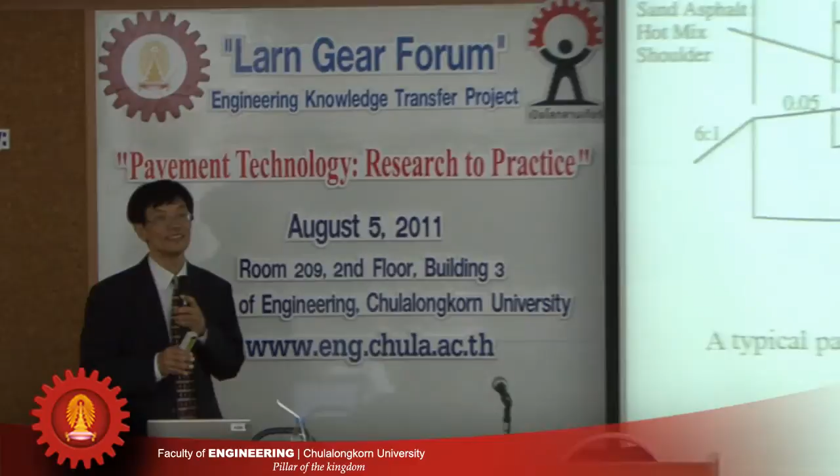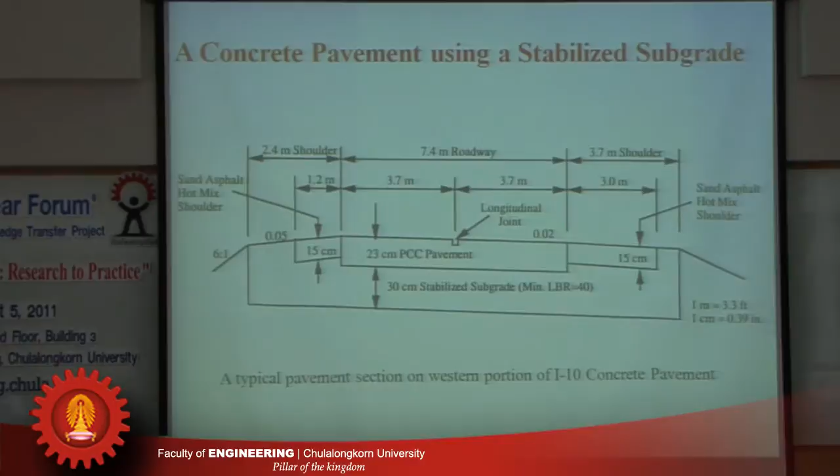When I got to the University of Florida in 1982, I noticed there were some problems with the concrete pavements on that road, and so I got a chance to investigate what the problems were.

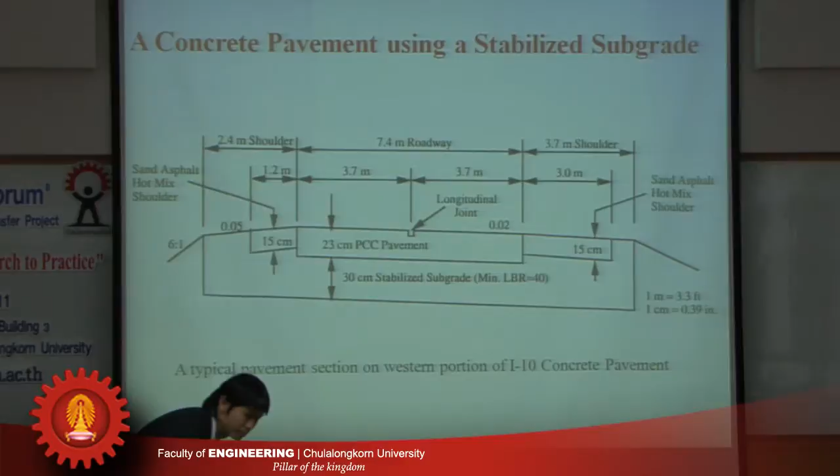At the beginning, when they constructed that concrete highway, this was the design used: 23 centimeters of PCC, meaning Portland cement concrete, and underneath a stabilized subgrade, basically a subgrade soil mixed with some asphalt emulsion to make the stabilized subgrade. This was designed according to the AASHTO Pavement Design Guide.

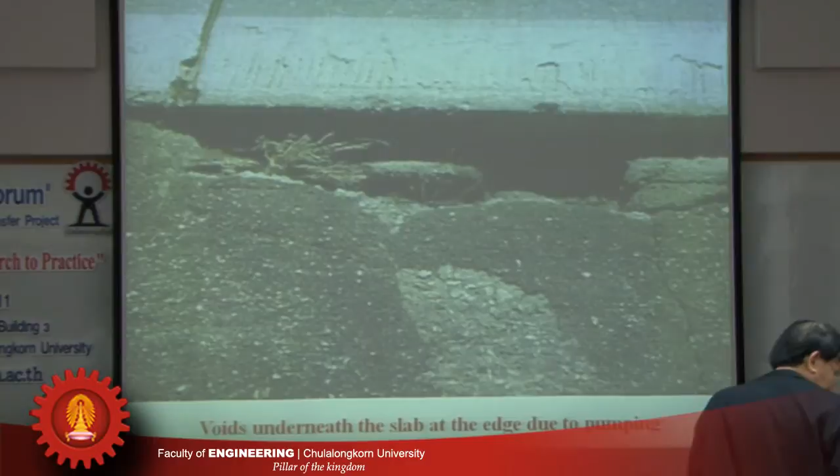However, there were pumping problems. Pumping is the erosion of the sub-base material, creating voids underneath the slab.

This is caused by inadequate drainage. Water could not drain away and was trapped underneath the slab, so when vehicles went over it, material got pumped out—this problem is called pumping. When the material got ejected from underneath the slab, it brings with it the sub-base material, and after a while it creates voids underneath the slab.

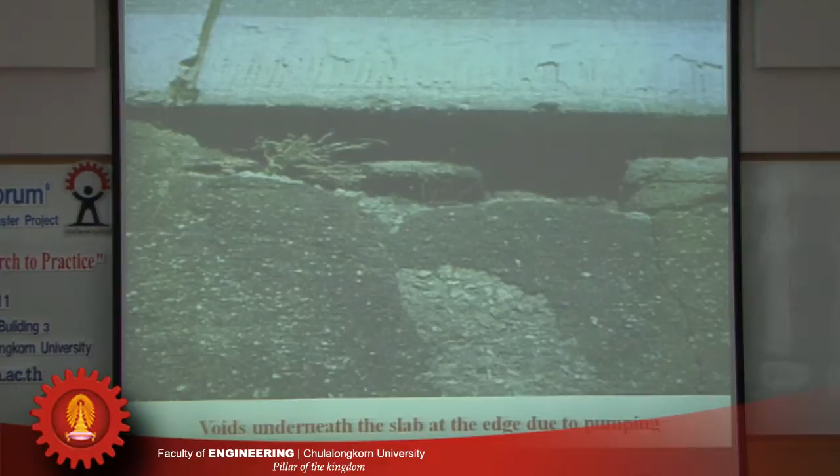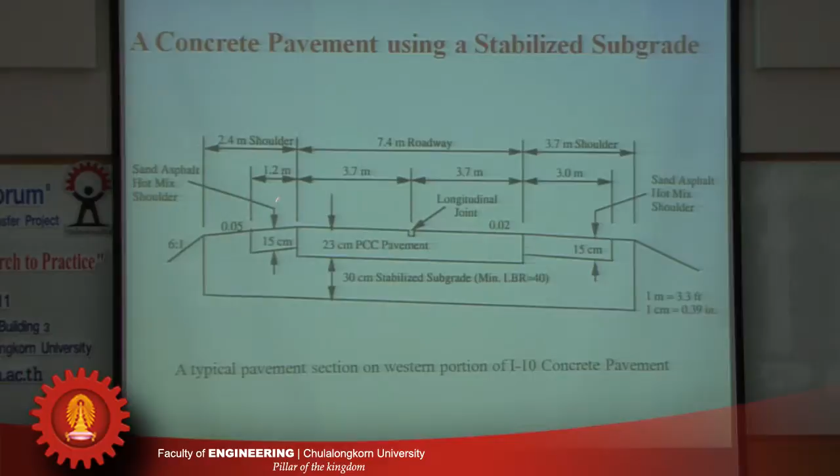The problem was because there was no sub-drainage system installed in that pavement. So even though this pavement seems to be adequately designed according to the design guide, there was no drainage underneath it. When water got underneath the slab, there was no way out, and it was trapped there. When vehicles go over it, the water got pumped out from the edge and joints, and pretty soon there's voids. When there's enough voids, it cracked because the slab was not properly supported.

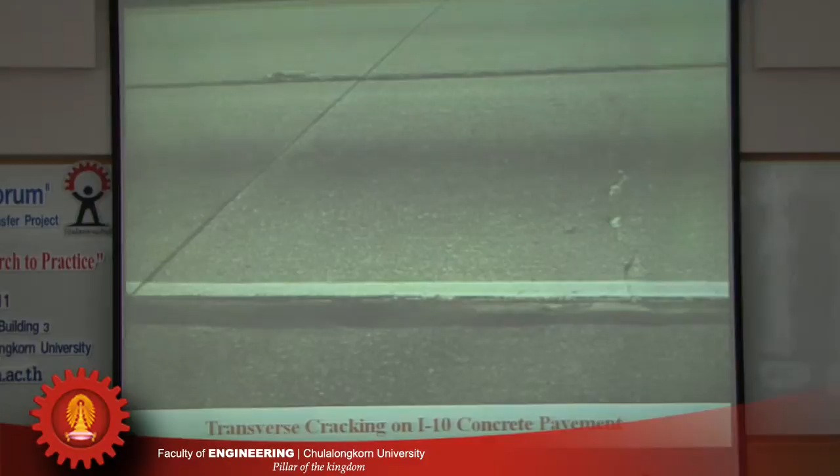So I looked into the history of what happened when they found out they had the problem. They changed the sub-base design, thinking the sub-base was not strong enough. What if we improve it, make it into an even stronger material, so it wouldn't be eroded away? So they changed the design to this.

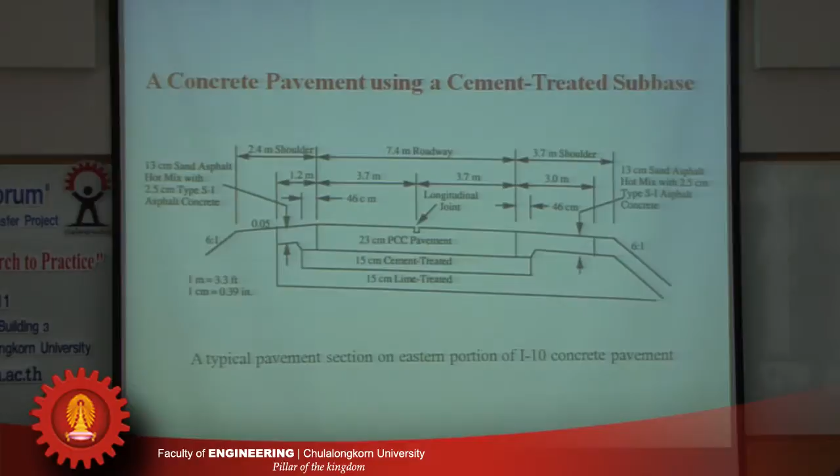This material, even though it's stronger, is less drainable. Water got trapped underneath the slab even more, with no way for it to get out, and so there was even more cracking. With the stronger subbase, the pavement actually performed worse.

Now they finished construction of this stretch of highway with some problems showing up. The next highway they constructed was in the south—a highway that goes north and south, south of Tampa. This was I-75 in Sarasota and Manatee County, south of Tampa.

Because of the problem on that previous concrete highway, some changes were made. What was the change? Well, the cement-treated subbase was found to be eroded, so they made the subbase even stronger. An Econocrete was used as a subbase now, and because it's a stronger subbase, it's called base. In concrete pavement, if the subbase is strong, you call it base; otherwise you call it subbase.

So we have a strong base—Econocrete—but unfortunately no sub-drainage system was installed. If we had installed a sub-drainage system, the problem wouldn't happen. Some additional design features were also used.

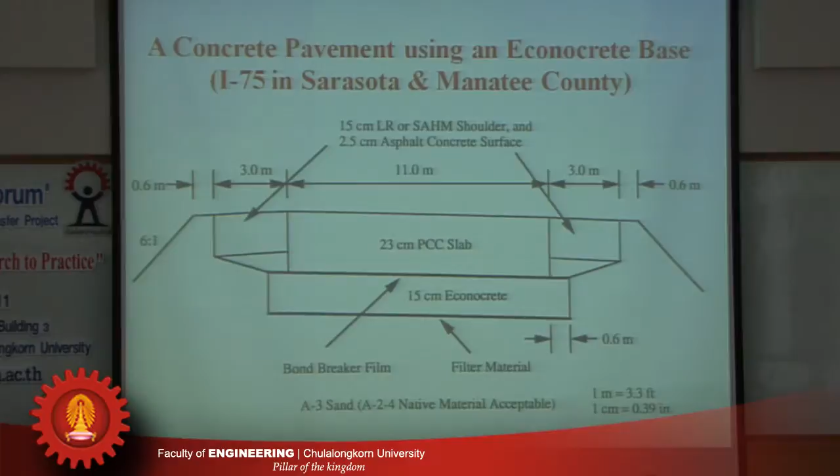Including a skew joint. The joint was cut at an angle, and the idea was that if it's at an angle, when the actual load goes over the joint, only one wheel would cross over at one time, so there would be less of an impact effect.

But it turns out it didn't work very well, because with the skew joint, some angles were smaller—we have an acute angle—and the stresses in this corner were actually higher, and we had a lot of corner cracks. In addition, they also used a variable joint spacing.

of 15 foot, 16 foot, and 22 and 23 feet—different variable joint spacing. The idea was that when you have variable joint spacing, a truck going over it would have less of a problem with synchronization, and this impact effect would be lessened.

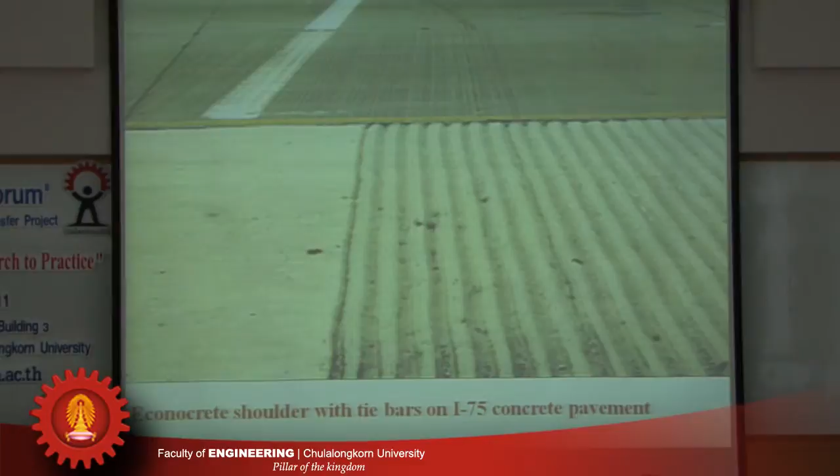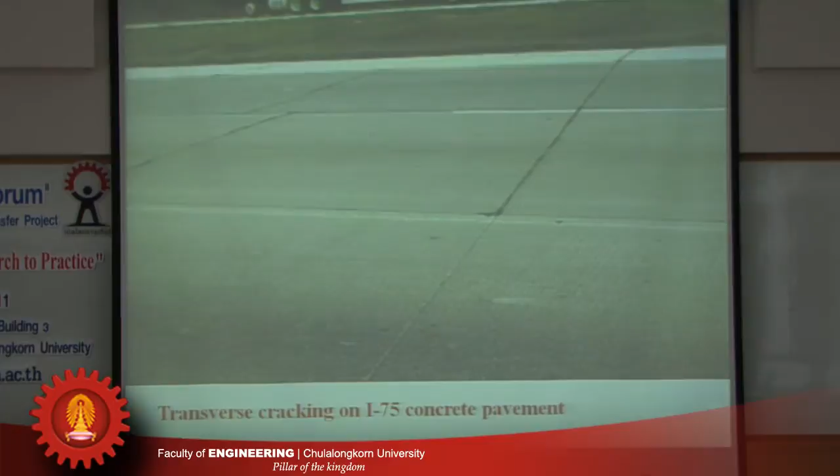But soon after this road was opened to traffic, transverse cracking was observed, occurring on the longer slabs. According to the traditional way of calculating stress, the cracking shouldn't occur in this fashion.

There was also pumping, which came as a surprise because they thought the Econocrete was non-erodable, being much stronger—but yet there were signs of pumping. When they collected the material coming out and analyzed it in the lab, they found it actually came from the Econocrete base. So we cannot have a non-erodible base.

So water damage is very serious. Whenever you have a lot of rain, there must be a system to get the water out, no matter how strong your base is.

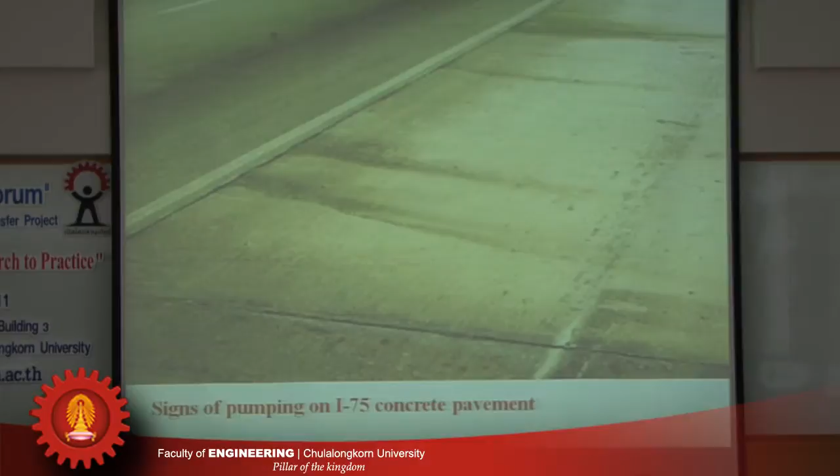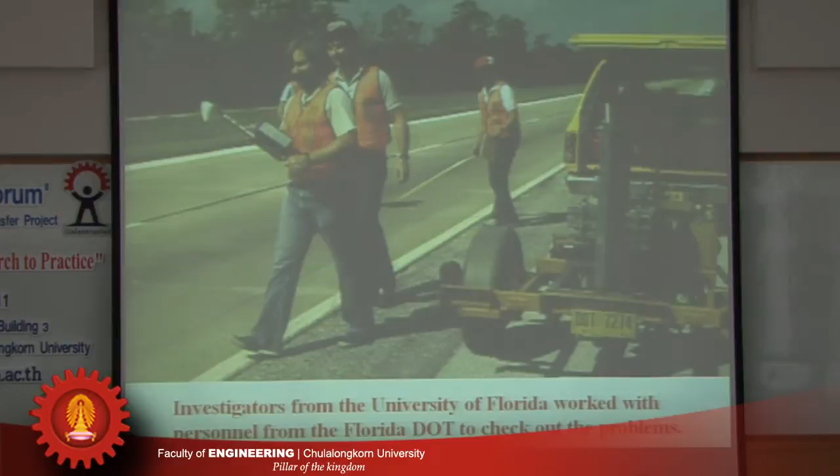Okay, so in 1982, when I was much younger, I worked with Florida DOT's staff to investigate the problem. We checked out dowel bars, checked out drainage, and there was no problem with the surface drainage.

The problem was with the sub-drainage. The water could run out fairly easily on top, but whatever got underneath the slab, there was no sub-drainage system to get the water out.

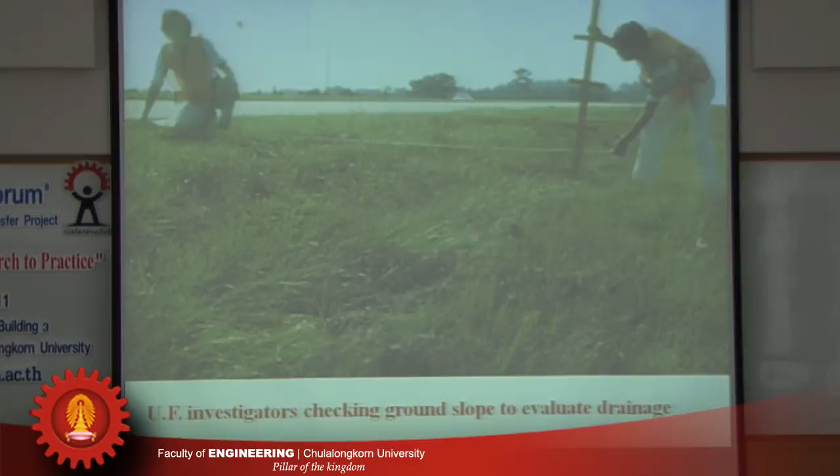They also ran FWD tests. One of the things that puzzled us is why the longer slab cracked in half. If you run the stress analysis the conventional way, there was no difference in stress, whether the slab was longer or shorter. The stress is the same.

But if we consider the temperature effect, there might be a difference, and in fact we found out there's a great difference when there's a temperature effect.

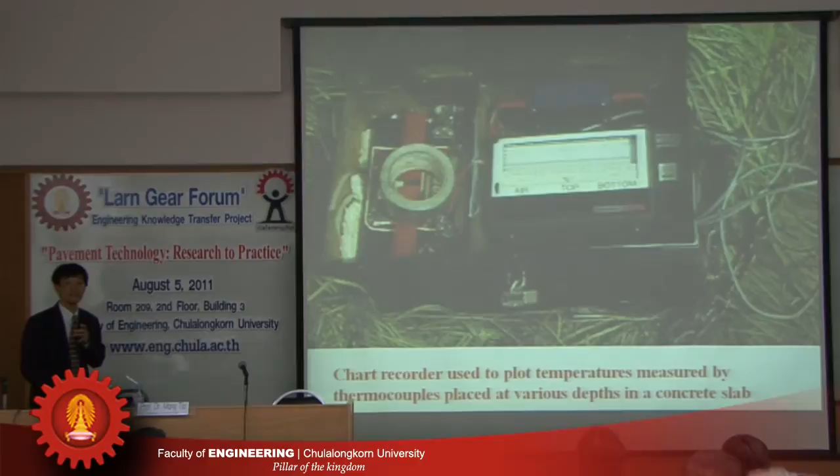We didn't know what the temperature was, so we collected some data on temperature. We drilled holes to different depths of the concrete slabs. We inserted thermocouples and connected them to plotters. 20-some years ago, we didn't use computers as much, so it was connected to physical plotters.

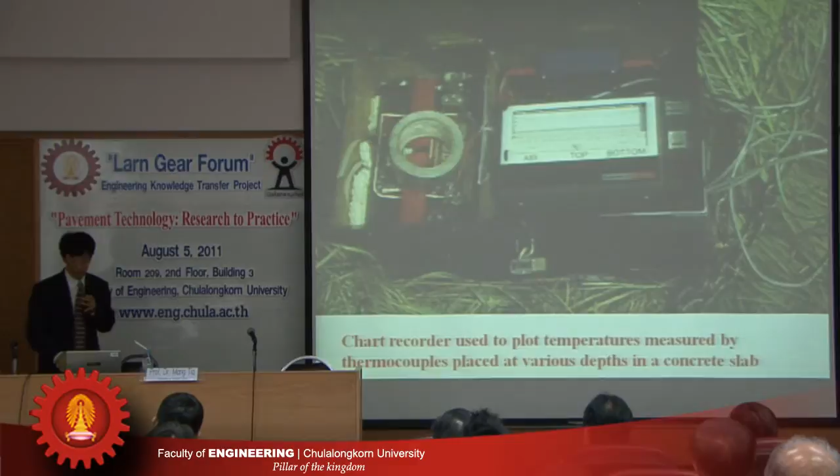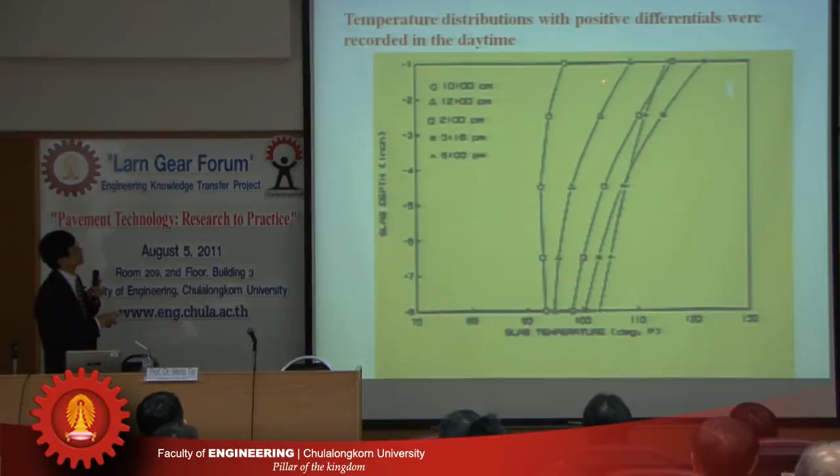And we got plots of temperature versus time at different depths of the concrete slab, and we got this type of temperature distribution at different times of the day. Basically this represents temperature at the top and temperature at the bottom. This is 1 inch below the top. This is 8 inches below the top.

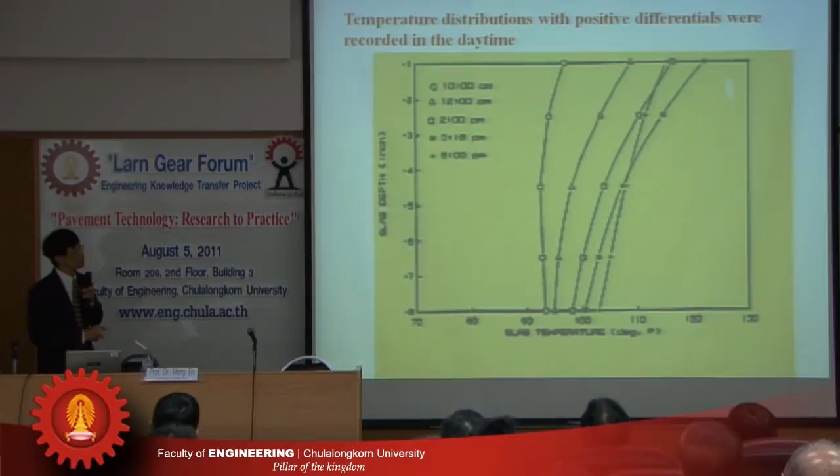We found that in the middle of the day, the temperature at the top is much higher than the temperature at the bottom, and this temperature plot changes with time throughout the day. But what we found is that the temperature is much higher at the top than at the bottom in the middle of the day. At night it's the other way around. At night, the slab is losing heat, and we end up in a situation where the temperature is much lower at the top than at the bottom.

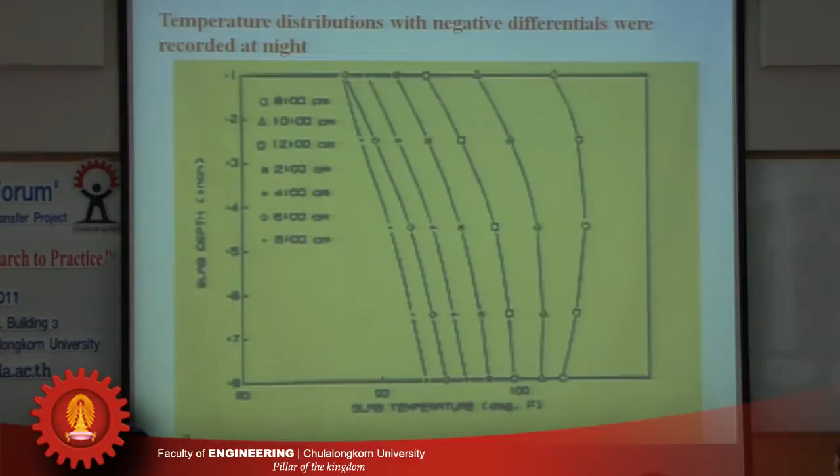What kind of effect does this have on the pavement? Conventionally, we analyze the pavement as if it's perfectly, well supported by its foundation. But at night, when the temperature is lower at the top, it may curl up this way, and in the middle of the day it may curl down this way.

Now the length of the slab has a great effect. When the slab length is longer, under this condition, when you put on the same load, the stress is much higher, and this was not considered before.

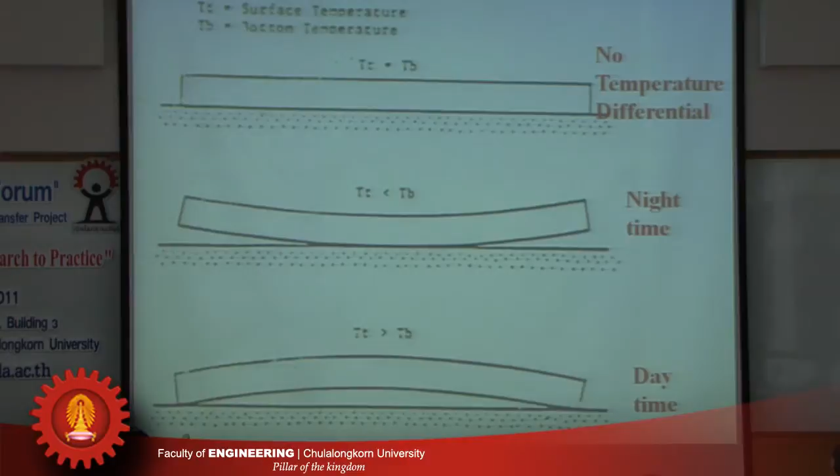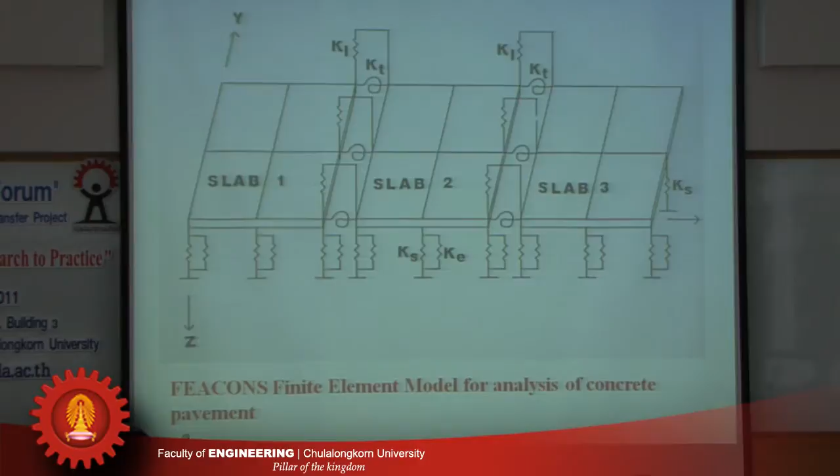So we developed a finite element program to do this type of analysis. Instead of calculating the stress under a normal condition where there's no temperature effect, now we do the analysis with the temperature effect, in the condition in the daytime. Typically in the daytime we could have a temperature difference of plus 20 degree F, or about 11 degrees C—it's hotter at the top than at the bottom by 11 degrees C.

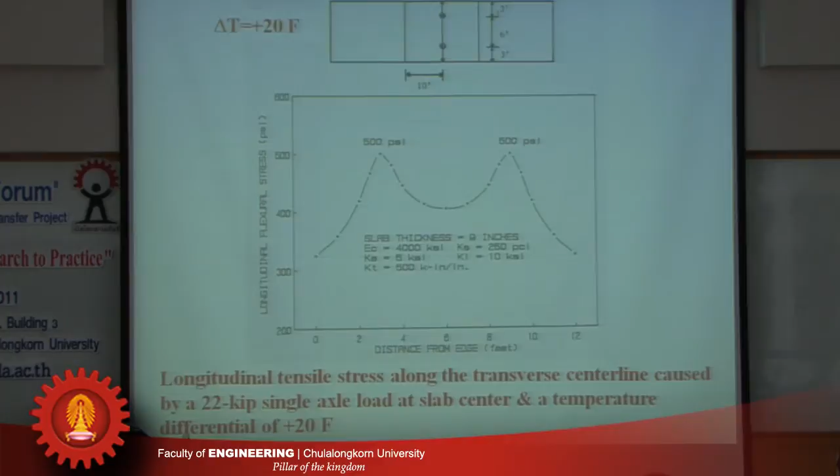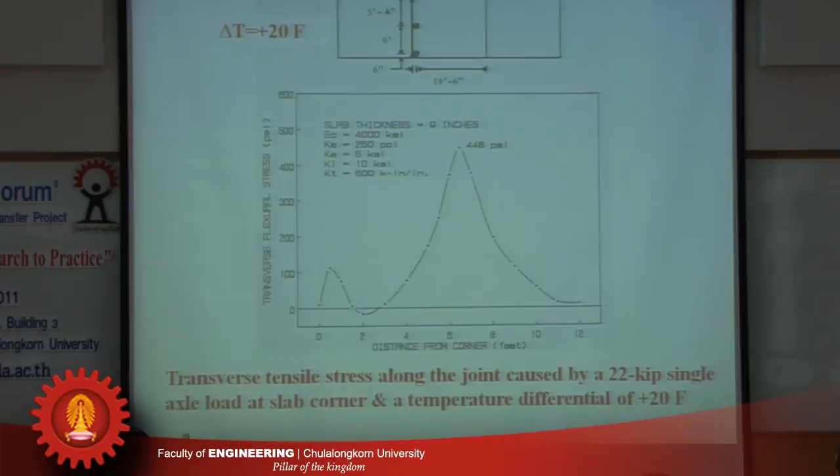Now with this temperature difference, this represents a slab and the two adjacent slabs, and this represents the axle load. So we put the axle load at the center and get a plot of stress due to that load. Then at that position, we put the load near the joint and get a plot, and put the load near the corner and also near the edge.

It turns out that when we have a positive temperature differential, representing the middle of the day, this represents the most serious condition. The stress under this condition is much greater than when you don't consider temperature differential, and the stress is actually about twice as much. So the slab length becomes significant, and this explains why the longer slabs will crack in half.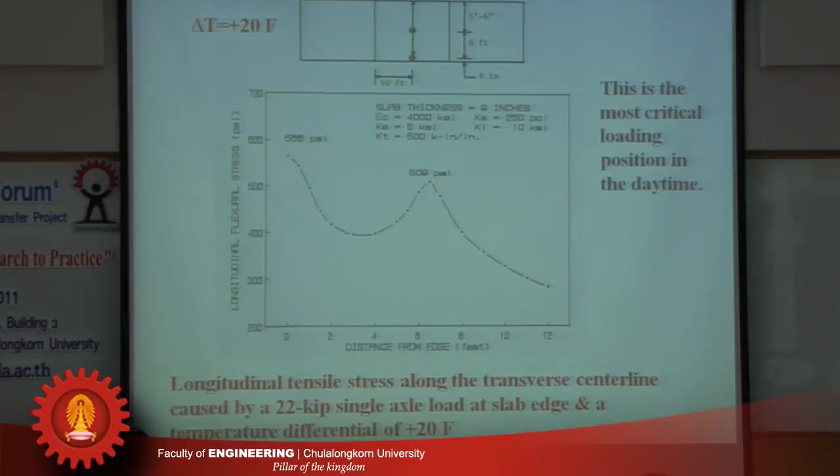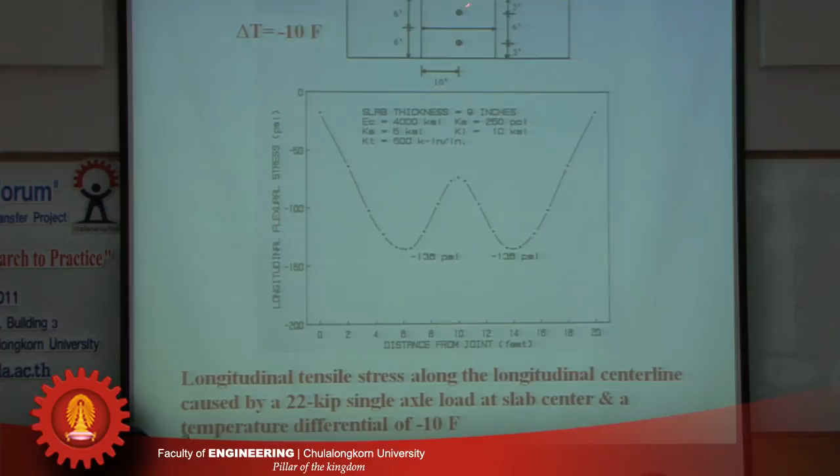We analyzed the night condition as well. At night, the magnitude of the temperature difference is not as big. Typically in the daytime we have plus 20 degree F; at night we have negative 10 degree F, about 5.5 or 5.6 degree C. So we do a similar analysis, putting the load at the center, near the...